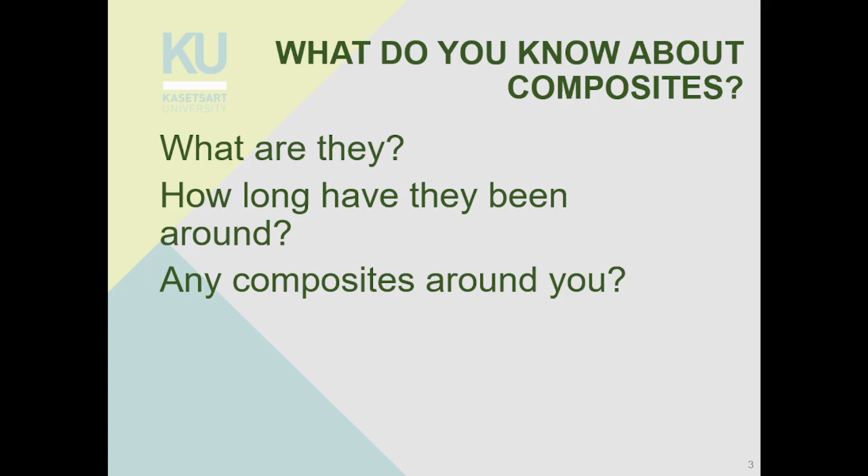But like I've just mentioned, composite materials have been around for a long time, right? So in fact, during the times of the Egyptian pharaohs who built the pyramids, composite material has also already been used. They used composite material to build the huts for the workers who built the pyramid. You might think of this as a simple brick, right?

But it's not that simple. It's not just made of clay. Usually they put in some straw, some husk like rice husk or wheat chaff in that to increase the strength of the bricks. In fact, nowadays we still do that. We still put some rice husks in clay brick to increase the strength. So it's been around for thousands of years - the concept of composite materials has been around for thousands of years.

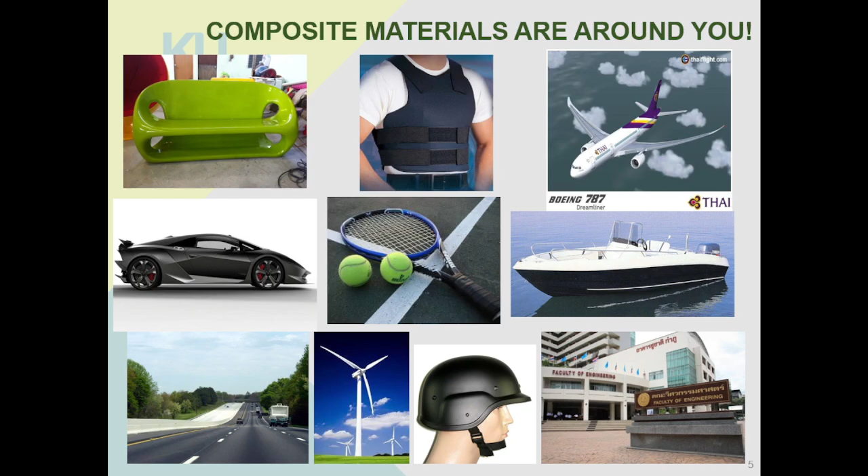So what is composite material? A composite material is a material that is made by combining two or more materials, and usually those two materials have different properties. When you combine them together, you make a material with unique properties that combine the properties of those two starting materials. The two materials work together to give the composite unique properties.

Within the composite material, you can tell the different materials apart. They do not dissolve or blend into each other, so you have a clear phase boundary. For example, alloys, say brass alloys. An alloy is when you mix two different elements together, like brass, where you're mixing zinc with copper to get brass. So you have zinc and copper, two different materials, but when you mix them together they are not composite material, they are alloys, because those two materials blend together to form a new material.

You cannot see a clear phase boundary between zinc or copper. Even though brass has better properties than zinc or copper, which satisfies this criteria here, they do not separate in such a way that you can identify this part is zinc, this part is copper. Because of that, alloys are not composites. An alloy is just a different class of material altogether.

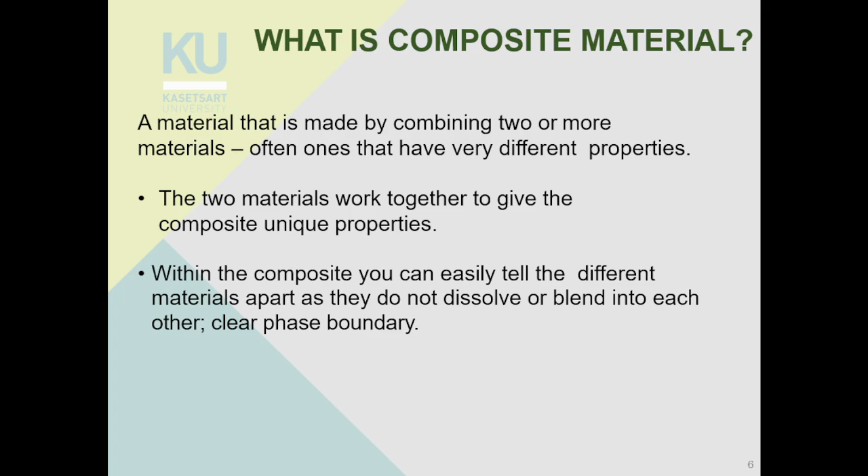Okay, so that is what a composite material is. So next we will look at the different categories of composite material by considering the constituent materials.

So when we classify composite material, we can use two different criteria. The first criteria is to look at the matrix. The second criteria is to look at the reinforcement phase. Basically, composite material consists of the matrix and the reinforcement.

Usually the matrix is the starting material - not always the case, but in about 80-90% of cases, the matrix is the starting material, and then we put in the reinforcement phase to enhance the property of the matrix. The matrix phase is the continuous phase. The purpose of the matrix phase is to transfer stress or transfer the load to other phases and protect other phases from the environment.

And we can have three different types of composite if we use the matrix phase as the criteria: metal matrix composite, ceramic matrix composite, and polymer matrix composite. So the criteria to classify composite material depends on the type of matrix that we use - whether it is a metal matrix composite, ceramic matrix composite, or polymer matrix composite.

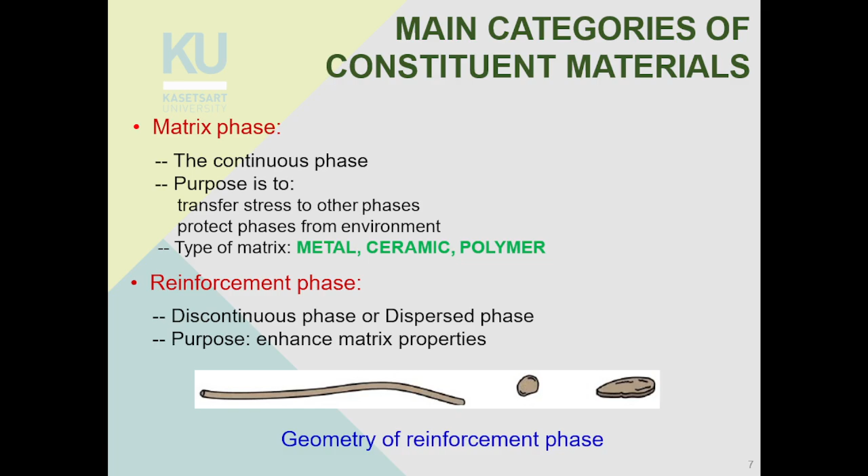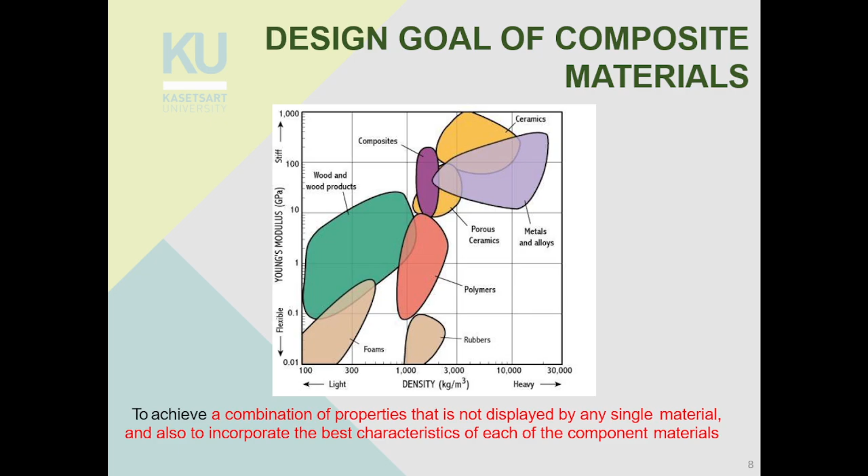E is Young's modulus or elastic modulus. So basically, polymers have really poor mechanical properties compared to other groups like ceramics and metals. You can see here, polymers have really poor Young's modulus compared to ceramics and metals. But polymers are lighter, so we want to make a material that is light because we want to use polymer. But at the same time, we want to make it stronger, tougher by increasing Young's modulus, yield strength, tensile strength, by adding in some other reinforcement.

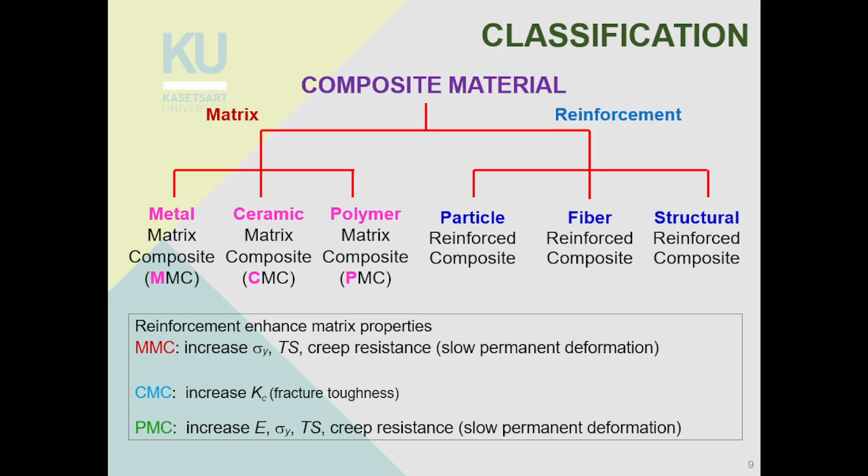So let's see - the classification by the matrix is quite straightforward. It depends on the type of the matrix, and you can classify it quite easily. But the classification by using reinforcement can be a little bit more tricky because you can have some subcategories.

So you have particle reinforced, fiber reinforced, and structural. For particle reinforced, you can have large particle, or you can have really small particles, which is called dispersion strengthened composite. So for particle reinforced composite, you can have large particle reinforced or really small particles reinforced. For example, large particle reinforced is concrete, or dispersion strengthened is cast iron. So looking in more detail there.

For fibers reinforced, you can either have continuous or long fiber. When you have continuous fiber, you can have alignment of the fiber, so the properties will be somewhat anisotropic. For discontinuous or short fiber - so for fiber, you can say that you have two types: long fiber, which is continuous fiber, or short fiber, which is discontinuous.

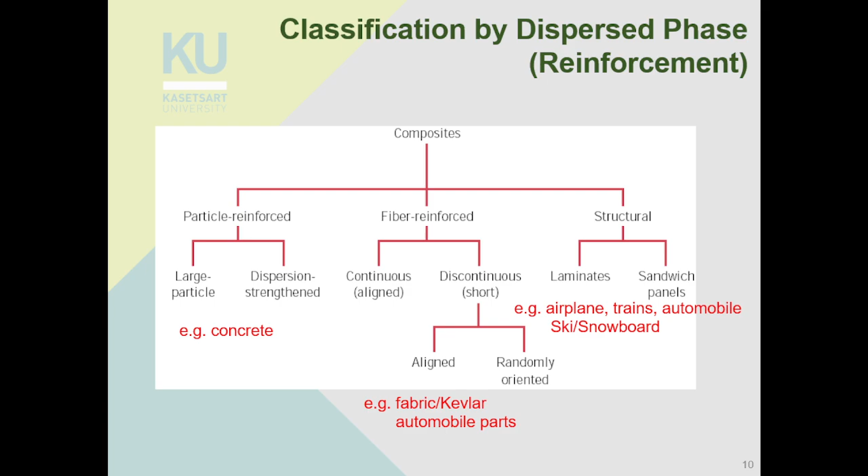We don't want to make it out of concrete or a thick sheet of metal because of the weight. So we are using structural composite to make it feel like we are walking on a thick sheet of metal, but really we are stepping on a few millimeter piece of metal with some stuff inside. So those are sandwich panels or laminates. We'll look into more detail.

So first we'll look at the particle reinforced composite. Like I mentioned earlier, you can have either large particle composites or dispersion strengthened composite, depending on the size and depending on how those particles can help improve the load, improve the mechanical properties of the matrix.

For large particles composite, the improvement in mechanical properties come from the strong bonding between the matrix and the particle interface. So say you have a piece or a cube of large particle reinforced composite like concrete - you have matrix, which is made from cement, and particles, which is rocks and gravel. So you have this strong bonding so that the load is transferred to the aggregate quite easily.

For this type, for large particle composite, the particles can have quite a variety of geometries. But the particles should be approximately the same dimension in all directions, or equiaxed. In other words, you can have different shapes and sizes, but ideally the particles should be about the same size in the x, y, and z axis. So either spherical or some sort of cubic shape is ideal, but it doesn't have to be.

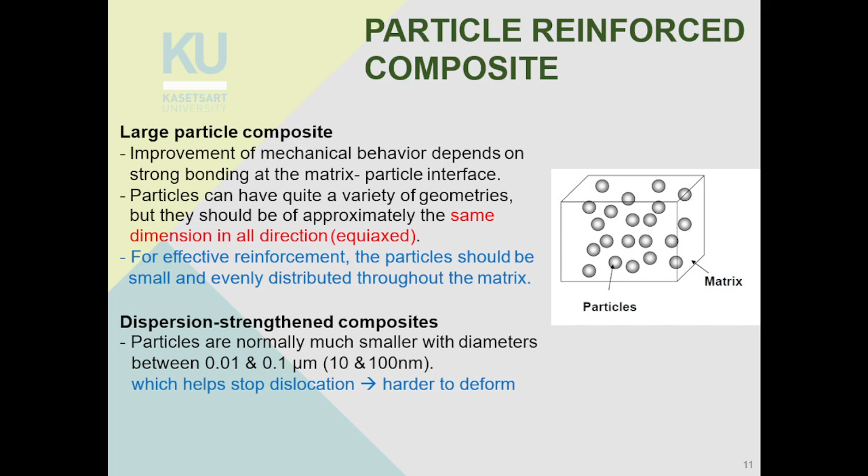If you look at this microstructure, you can see rubber as the matrix, and all these particles are carbon particles in the size between 20 to 50 nanometers. So it is actually a dispersion strengthened composite, because the particle size is between 20 to 50 nanometers, and because of these particles, dislocation movement becomes much more difficult. So the strength increases. Apart from the increase in strength, you have an increase in hardness as well.

Let's have a look at some example of ceramic or metal matrix composite, with cemented carbide, etc. For example, you have tungsten carbide and cobalt. Usually you mix tungsten carbide powder with cobalt powder, and then you sinter it in a method called powder metallurgy.

In powder metallurgy, you mix the powder together and then you sinter, or put it in the furnace at high temperature, but not as high as the melting temperature. So those two types of powder mix together and form this structure, and it can be used to coat or to make, for example, drill bits, cutting tools like circular saws, like this.

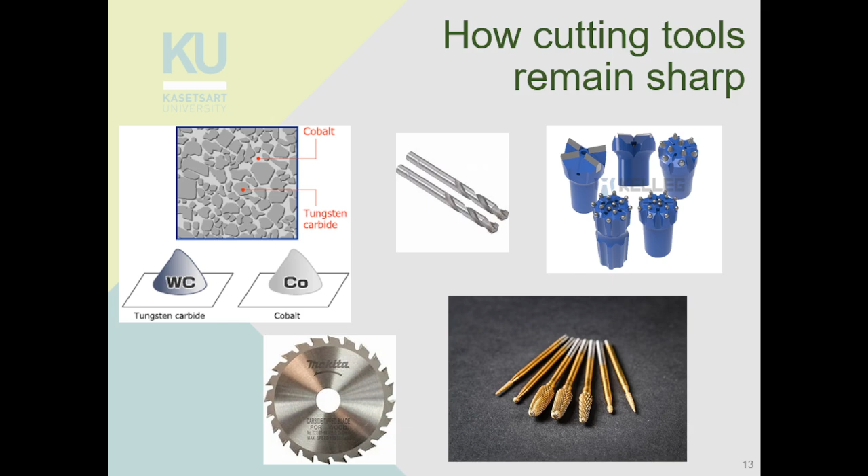So let's have a look at why we put some carbon black inside rubber. One of the unintended consequences of adding carbon black in natural rubber to make car tire is that it makes the car tire black, because we add in carbon black. The reason we want to add carbon black is because we want to improve the hardness, in other words, durability of the car tire.

But there are different amounts of carbon black that we can add to the rubber. For example, if we add a lot of carbon black, you make the car tire really hard, because we want to improve the hardness. But when the tire is really hard, it will last longer, but you will get worse grip.

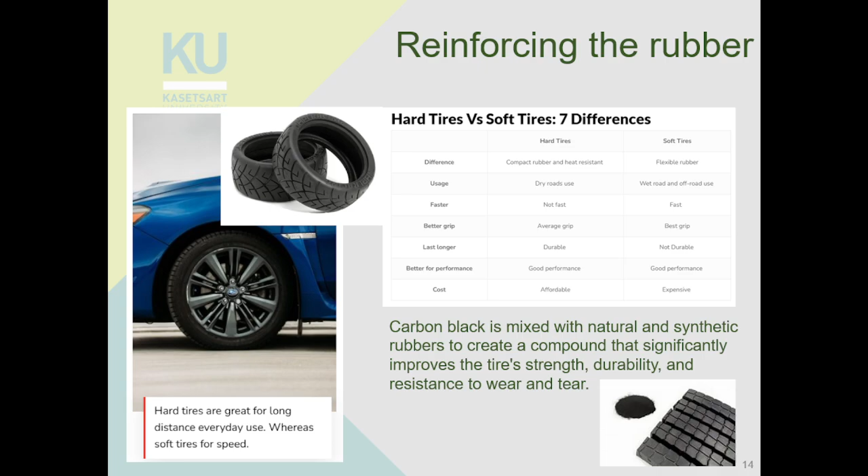Harder tires don't grip the road quite so well, but because they are harder, they will last longer. So you have to balance between those two factors.

Okay, next example is concrete. So what is concrete? Concrete is a particular type of composite material which is a ceramic matrix composite, but at the same time the reinforcements are also ceramics. So it's a special type of ceramic where the matrix and the reinforcement are the same type of material. Usually we use different materials from different groups to improve the property of the matrix. For example, fiberglass: we use glass fiber, which is a ceramic, to improve the property of the resin, which is a polymer. Or reinforcing steel in concrete, for example. But concrete itself is a composite material where the matrix is ceramic and the reinforcement is also a ceramic.

Concrete consists of cement, or the full name Portland cement, plus sand and aggregates like rocks, crushed rocks, etc. Concrete is very strong, very hard, but brittle. Like I mentioned earlier, that's why we have to add reinforcing steel to improve the tensile property of the ceramic. Concrete is quite heavy and cannot be recycled. The density of concrete is about 3,000 kilogram per cubic meter, roughly the same range as the density of rocks.

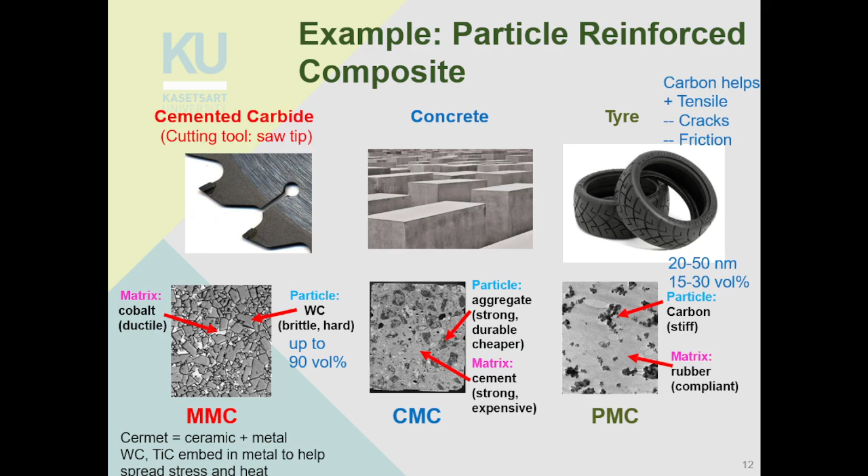So concrete is made from cement plus sand plus aggregate. First we have to know what cement is. Portland cement is the most widely used type of cement in construction or engineering applications. There are other types of cement, but they are not as popularly used because they are usually more expensive. Portland cement itself is relatively cheap, but compared to natural materials like rocks and aggregates, cement can be quite expensive. But compared to other types of cement, Portland cement is relatively quite cheap.

The reason for that is the raw ingredients for making Portland cement are natural ingredients like limestone, clay, and iron ore. We take all these natural materials, we crush them all together, and then we burn them in a rotating kiln or furnace, a rotating furnace called a kiln.

We get rock-shaped pieces about thumb size called clinker. So clinker is the product from crushing and burning all these materials together. But clinker is too big, about thumb size, so the surface area is quite small. We want to make the surface area bigger, so we want to make the clinker smaller by crushing the clinker into powder, increasing the surface area of the cement. And we add gypsum, or calcium sulfate, to retard the reaction, to make it a bit slower. So we get Portland cement. By mixing these three natural ingredients and burning them - we crush them and then burn them in the kiln - we get clinker.

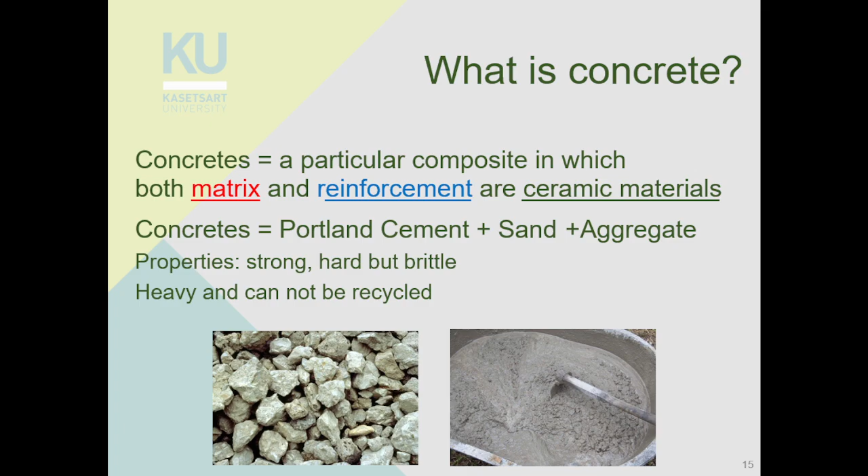Concrete consists of Portland cement, sand, and aggregate. We've looked at Portland cement, so next we'll look at sand, the next ingredient of concrete. Sand is chemically silica, which is silicon dioxide.

Sand is silicon dioxide, and it is a fine mineral. The size of the grain of sand that we use in concrete is between 0.1 to 1 millimeter diameter. 0.1 millimeter is about 100 microns, so between 100 micrometers to 1 millimeter. Basically the smallest size of sand that we use has the same dimension as the thickness of a human hair.

All sand contains some absorbed water because sand particles have a lot of surface area and absorb moisture from the air. So you have absorbed water, and sand is used to fill voids between the coarser aggregates. When you pack rock together, you have holes between those pieces of rock, and sand can go in and fill those spaces to make the structure denser and use less cement as well.

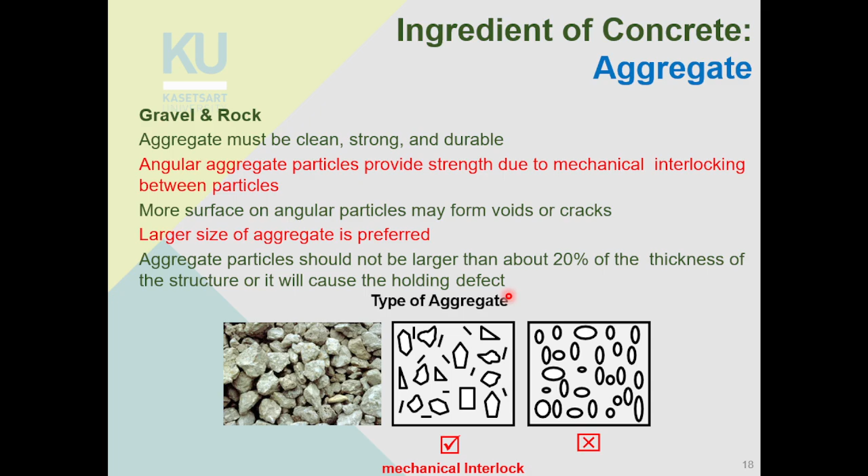In concrete we have cement, sand, and aggregates. The only ingredient left is water. So we mix water with cement and we get a hydration reaction. Hydra is the Greek root for water, while the Latin root for water is aqua. So a hydration reaction is basically the reaction with water. In this case, cement hydration is the reaction of cement with water.

You can see that for tricalcium aluminate, when it reacts with water, you get this structure here, plus another type of chemical plus heat. Dicalcium silicate reacts with water to give calcium silicate hydrates with heat. For tricalcium silicate with water, you get calcium silicate, hydrated calcium silicate, and also calcium hydroxide.

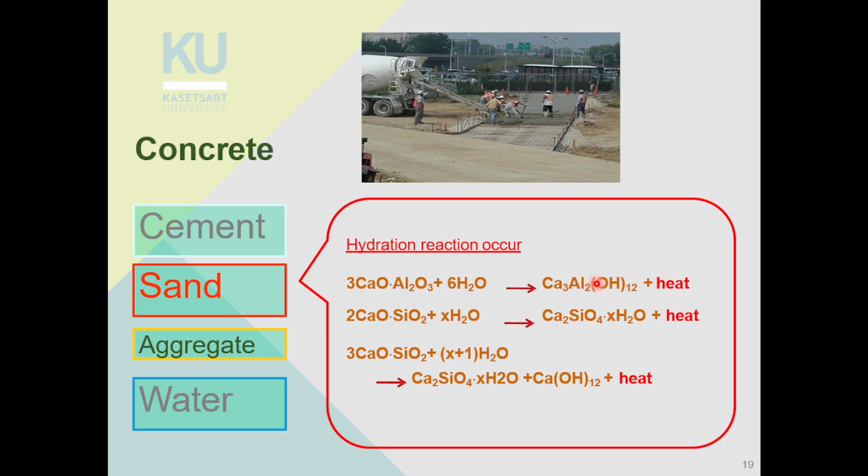Next, we look at the curing and properties of concrete. Like previously mentioned, in cement you have three main active ingredients: alite, belite, and celite, and they react to water differently. alite and celite react faster with water, and belite reacts with water more slowly. The strength of the cement and concrete depends on the reaction of alite, celite, and belite. You can see that the high strength comes from the reaction of belite and water to get your higher strength.

But it takes a long time. So that means for concrete to achieve the high strength that we require, it will take a long time as well. Hence the curing process — basically, concrete is expected to be cured for 28 days until it reaches the optimum strength.

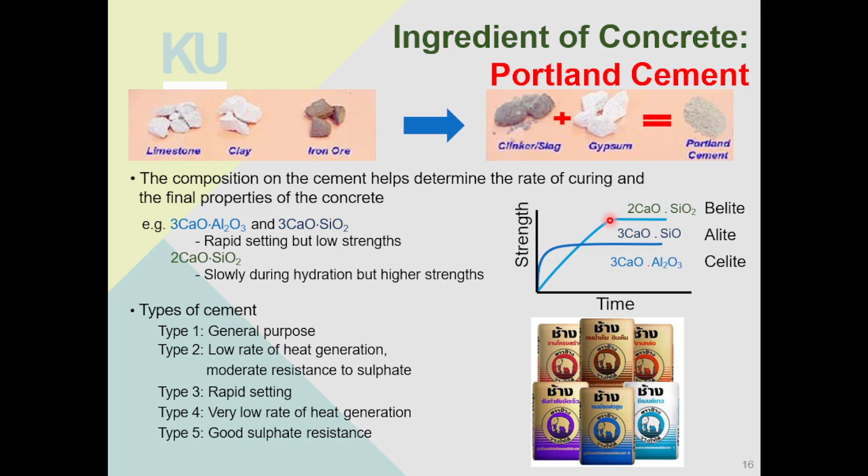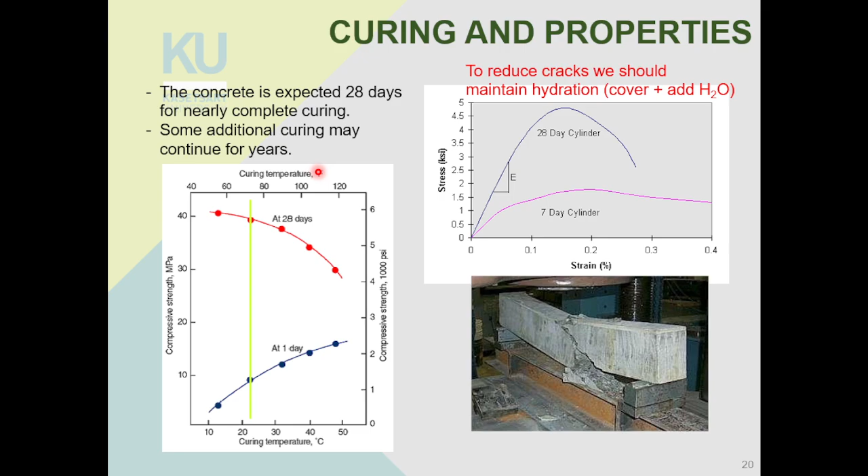The reason for that is, as mentioned earlier, the strength of concrete comes mainly from belite - the ultimate strength, the final strength, comes from belite. And belite reacts really, really slowly with water. It takes up to 28 days to get up to the maximum strength, or close to the maximum strength. Sometimes it takes years to get to the maximum strength. If we can keep the water inside the concrete, it will develop increased strength years after it is first produced.

Important factors that influence the properties of concrete: the first one is the water to cement ratio. If you have too little water, you will have low strength, because you don't have enough water for the hydration reaction to occur. So you get low strength.

If you have a high water cement ratio, you will improve workability of the concrete. That means the concrete can flow much easier. You can shape it into the shape you want much easier over a longer period of time. Workability can be measured using a test called the slump test. We'll look at some tests in a bit.

But if we have too much water, we will have a decrease in compressive strength, and we will have an increase in shrinkage of concrete during curing, creating cracking. So we need an optimum amount of water - not too low, not too much. An optimum amount.

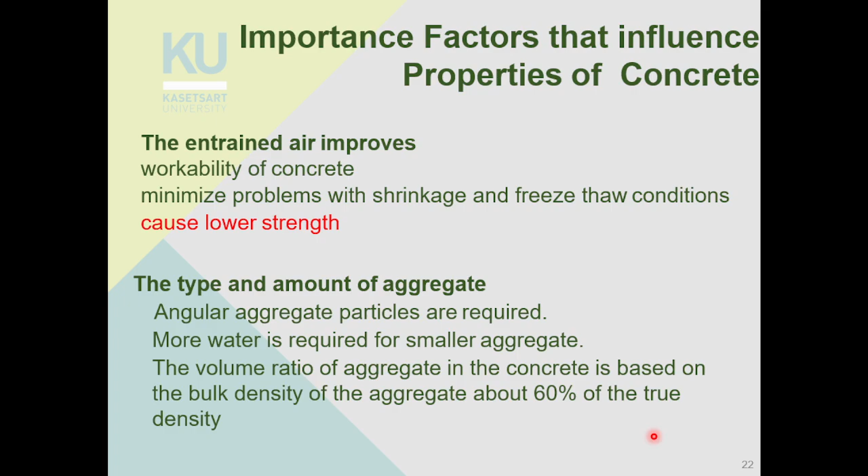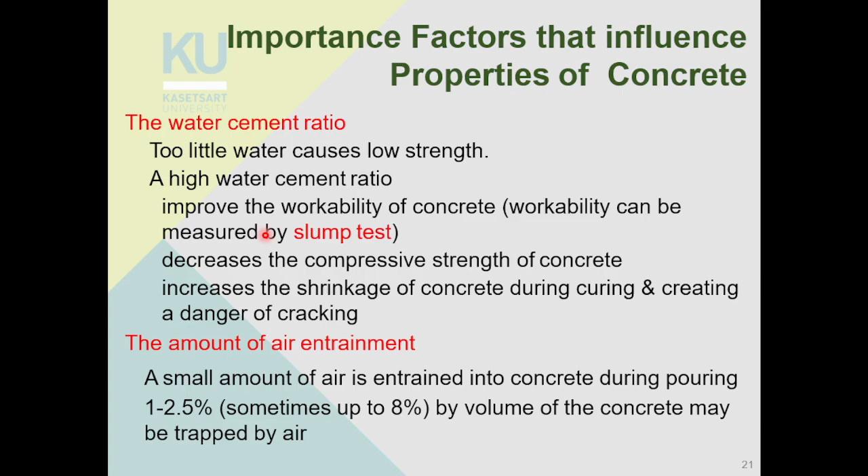So we were talking about workability of concrete, and a way that we can test for workability is by using a slump test. When we mix a concrete sample to use in casting a structure, we take a sample of concrete and put it inside a cone - this cone-shaped equipment, about 30 centimeters high.

On one side it's got 10 centimeter diameter, on the other side it's got 20 centimeter diameter. So you turn the cone upside down first, with the smaller side on the floor initially. Then you pack in concrete inside the cone, and then you turn it right side up, so you put the larger end on the floor.

When you put the larger end on the floor, you take off the cone, and you get this concrete slump. If you look at this picture, you have the concrete slump next to the cone itself. We measure the height at the top of this concrete slump and the top of the cone - the height difference between the two.

So for concrete with zero slump, after you take the cone out and measure, that's zero slump - meaning the top of the slump is the same height as the top of the cone. This is not very good because you don't have any slump at all, meaning it's really difficult to flow. We want a true slump, where the concrete flows down a little bit.

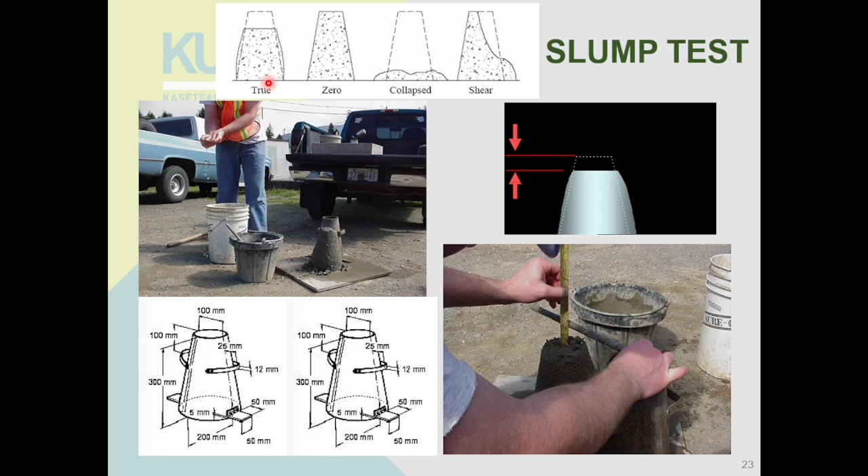So you have a little amount of flow. The slump test is usually reported in centimeters - how many centimeters different between the top of the slump and the top of the cone. We want a true slump, where the concrete holds its shape but not the same height. We don't want any collapse slump or shear slump - that means poor quality concrete and poor workability. For zero slump, there's no workability at all. For collapse or shear slump, we have really poor quality concrete. A true slump will give you good quality concrete and good workability.

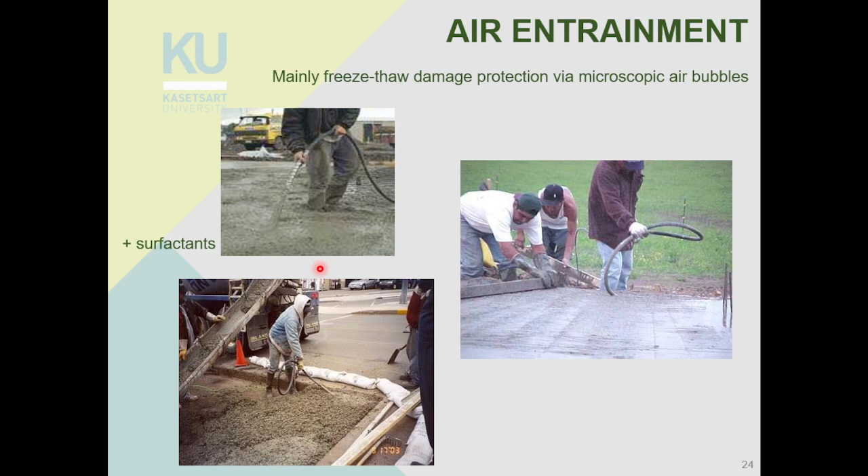The factors that affect the workability of concrete - one of them is air entrainment. We can use surfactant to increase air entrainment. Mainly, we control air entrainment to prevent freeze-thaw damage by creating air bubbles or entrained air inside our concrete, putting in some air inside the concrete there.

A quick question: we know about concrete, and sometimes if you consider the road surface, it's not concrete - we have asphalt mix. Sometimes we have asphalt mix on the road and not concrete. So the question is: is asphalt mix a composite material? And if it is a composite material, what is the matrix and what is the reinforcement?

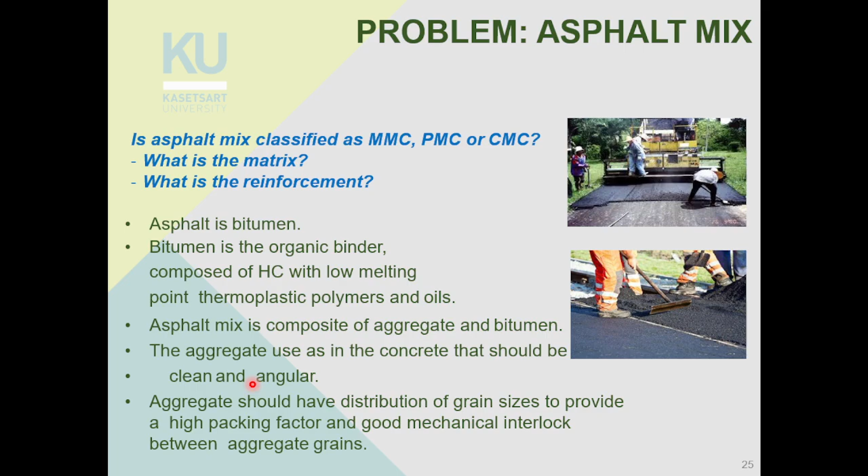Okay, so we've learned about different types of particle reinforced composite. Next, we will look at the properties of the particle reinforced composite. As you might imagine, the properties of the particle reinforced composite should have properties between that of the matrix and that of the reinforcement. So we will look at the different properties of particle reinforced composite.

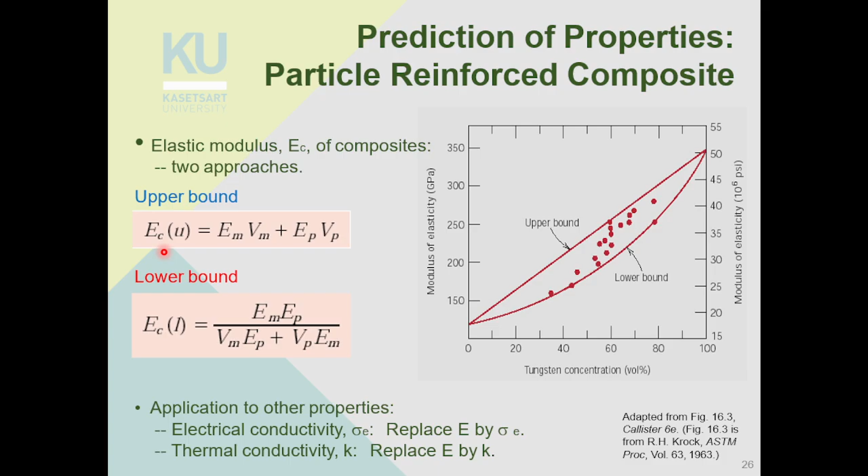This approach can be applied to other properties as well, like electrical conductivity, sigma E, replace E elastic modulus with sigma E. Thermal conductivity, replace E with K, etc.

An example: a large particle composite consisting of tungsten particles within a copper matrix is to be prepared if the volume fraction of tungsten and the copper are 0.4 and 0.6 respectively. Estimate the upper limit and lower limit for the specific stiffness of this composite given the data that follows.

Specific gravities 8.9 for copper, 19.3 for tungsten. Modulus of elasticity is 110 gigapascal for copper and 407 for tungsten.

For the upper bound approach, the elastic modulus is EMVM plus EPVP, so we just plug in the numbers. The matrix is copper, E copper is 110, volume fraction is 0.6, plus E particle, which is tungsten, is 407, volume fraction of 0.4. Calculating that, we get 228.8 gigapascal. Quite simple, really, for upper bound.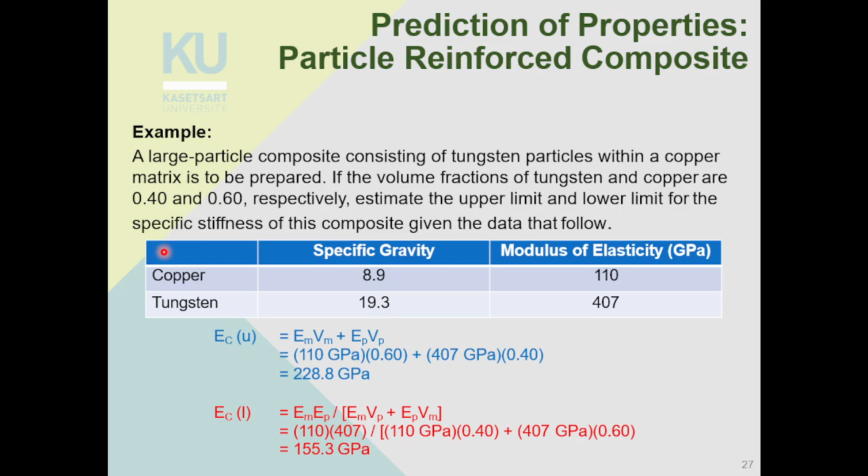For lower bound, we use a different formula: EMEP over EMVP plus EPVM. We plug in the numbers, we get 155 gigapascal. So for this particular composite material, the elastic modulus is somewhere between 155, the lower limit, and 228 gigapascal, the upper limit.

So we've talked about particle reinforced composite. Next, we'll look at fiber reinforced composite. For fiber reinforced, we can have whiskers, which are really short fibers, thin single crystals with large length to diameter ratio, of graphite, silicon nitride, silicon carbide, with high crystal perfection, extremely strong, very expensive.

So when we are talking about whiskers, we are talking about single crystals. That means that whole fiber is one crystal, and because of that it is very expensive to form, but it is extremely strong because it is a single crystal with high crystal perfection, so there's no defect. That makes it really, really strong, for example silicon carbide whiskers or boron nitride whiskers.

For fibers, we can either have polycrystalline or amorphous. Notice the difference here: whiskers are single crystal, but for fibers, it can be polycrystalline or amorphous. That's the difference. The size can be about the same.

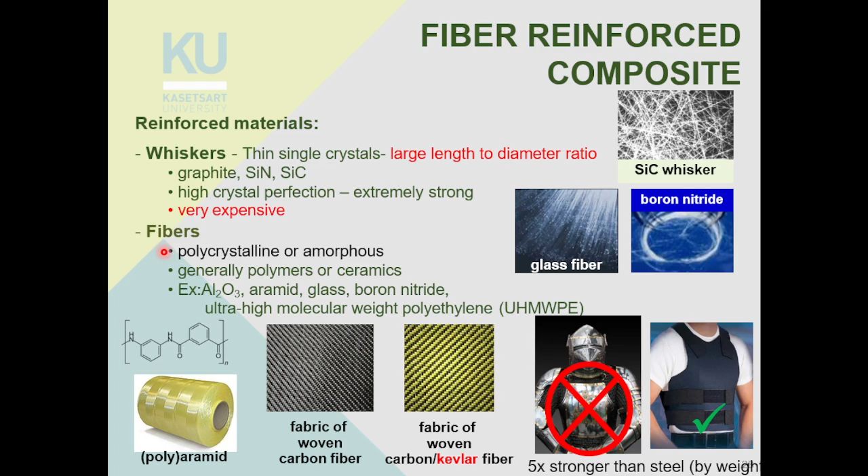But you can have other manufacturers that can produce polyaramid fiber in other colors, like black, as well. So it doesn't mean you have fake polyaramid, it just means you have fake Kevlar. Because carbon fibers and Kevlar fibers have different colors, when you weave them together you get this distinctive pattern. Kevlar fibers are about 5 times stronger than steel in tension, for the same weight, in tension.

Okay, so next we have possible arrangement of fibers in fiber reinforced composite material. There are many different ways the fibers can be arranged. When we have short or discontinuous fibers, we can have discontinuous and randomly oriented fibers, where the fiber direction doesn't matter - it's just random, pointing everywhere.

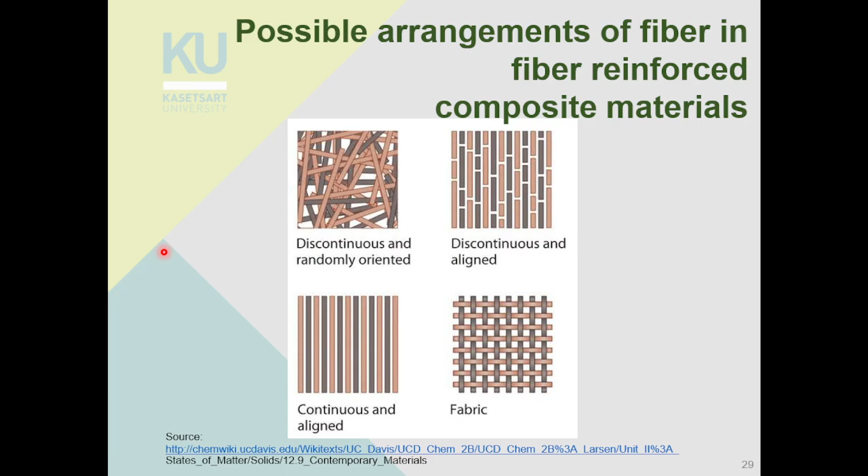And when I mentioned that these two pictures, even if made from the same materials, same matrix, same reinforcement, and same volume fraction, will have different properties - why is that? Because the fibers are strongest in the direction of the loading, the stress.

So if you look at this aligned continuous fiber, aligned discontinuous fiber, and randomly aligned fiber, you can see that for aligned continuous fiber, it is very strong in the direction of the fiber, and it is very weak in the transverse direction, because the fibers do not help transfer the load at all. So it is very weak in this direction, very strong in this direction.

And when you have different properties in two directions like this, we call that material an anisotropic material - anisotropic material, which means the properties of the material depend on the direction.

The same thing applies with short or discontinuous fibers that are aligned - you have better properties in the direction of the fiber compared to the transverse or any other direction. So they are anisotropic as well, for aligned discontinuous fiber. Anisotropic means the properties depend on the direction.

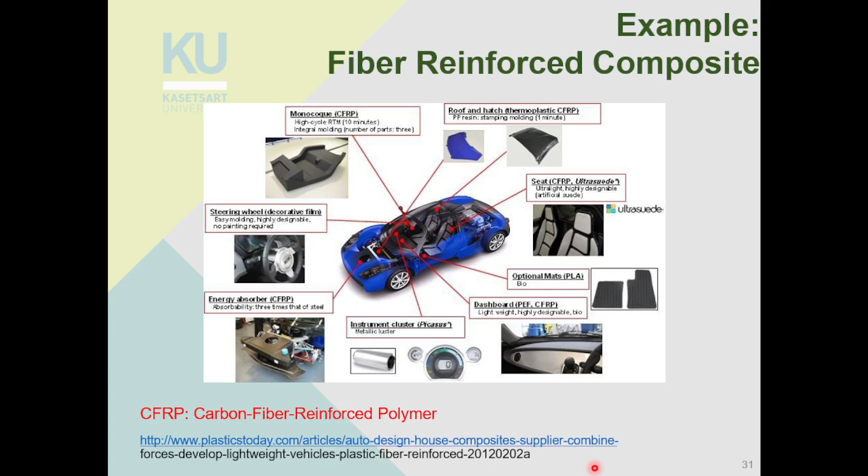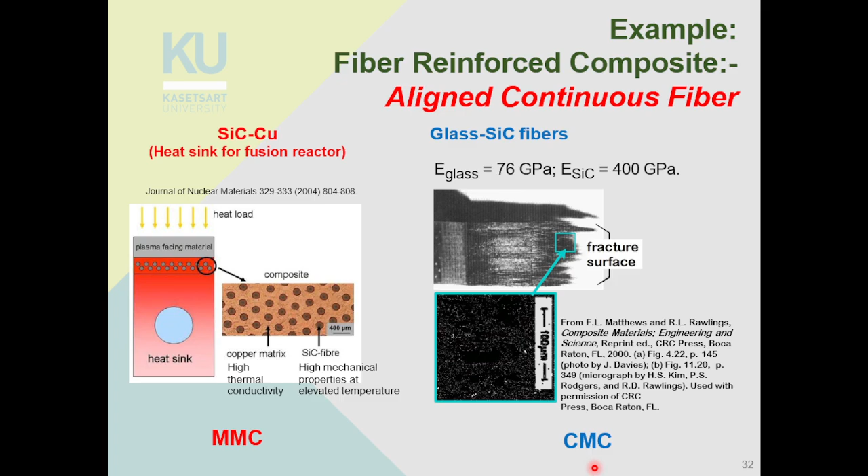Next is the glass silicon carbide fiber. In this case, glass is the matrix. Glass has really low elastic modulus compared to silicon carbide, so we add silicon carbide in there to increase the stiffness or elastic modulus of glass, and also to improve the toughness or K1C of glass. So the fracture surface becomes more ragged instead of flat like a typical fracture surface of glass. That means it can absorb more energy.

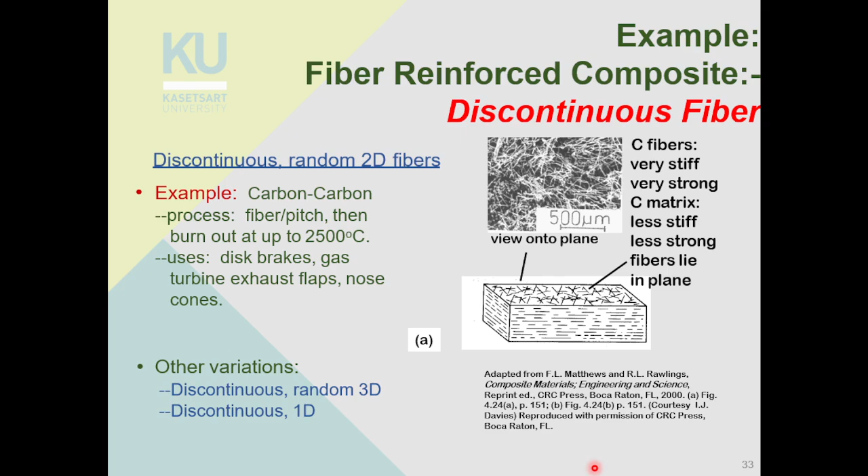So the enhancement of composite properties by variation of fiber length. For fiber reinforced composite, we have continuous fiber and discontinuous fiber, and the fact that we have discontinuous fiber means that different sizes of fibers can affect the reinforcement differently. We need a minimum size to classify that type of composite as fiber or short fiber, as compared to particles.

So if the size of the fiber is smaller than this minimum size, it can be considered a particle. If it's more than that, it can be considered a short fiber. And if it's longer than the maximum short fiber length, it can be considered a long fiber or continuous fiber.

The minimum length that we can consider a short fiber is called the critical fiber length, or LC, which equals sigma f times d divided by 2 tau c, when sigma f is the strength in tension of the dispersed phase, or the strength of the fiber.

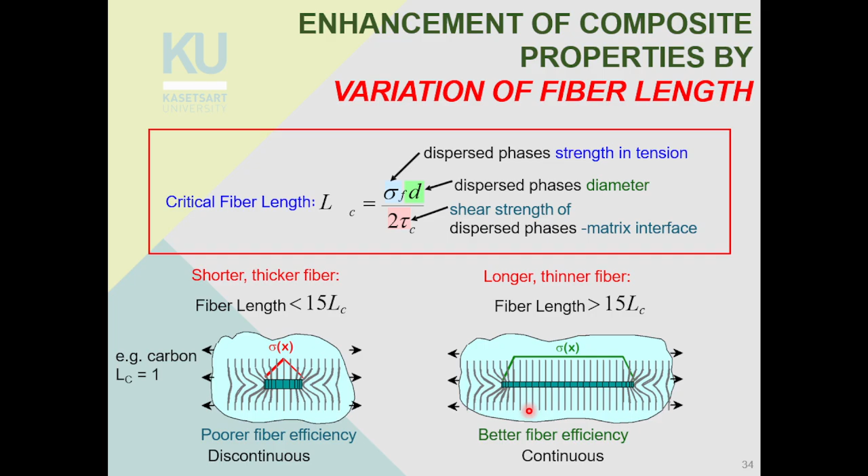For particle reinforced composite, we looked at properties of particle reinforced composite, and we use the upper bound approach and lower bound approach to estimate the strength, stiffness, or other properties of particle reinforced composite. For continuous fiber reinforcement, we can use the same approach as well.

The estimate of elastic modulus of the composite and tensile strength of the composite, in this case, is valid for continuous fiber composite, meaning long fiber, continuous fiber. The elastic modulus EC, elastic modulus of the composite, equals EM VM plus K EF VF, when EM is the elastic modulus of the matrix, VM is the volume fraction of the matrix, EF is the elastic modulus of the fiber, VF is the volume fraction of the fiber, and K is the efficiency factor. The efficiency factor depends on the alignment, whether it is 1D aligned, 2D aligned, or 3D aligned.

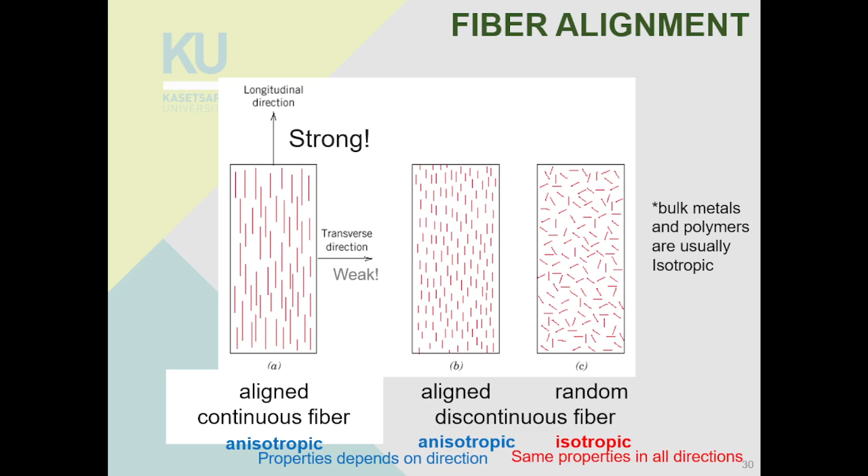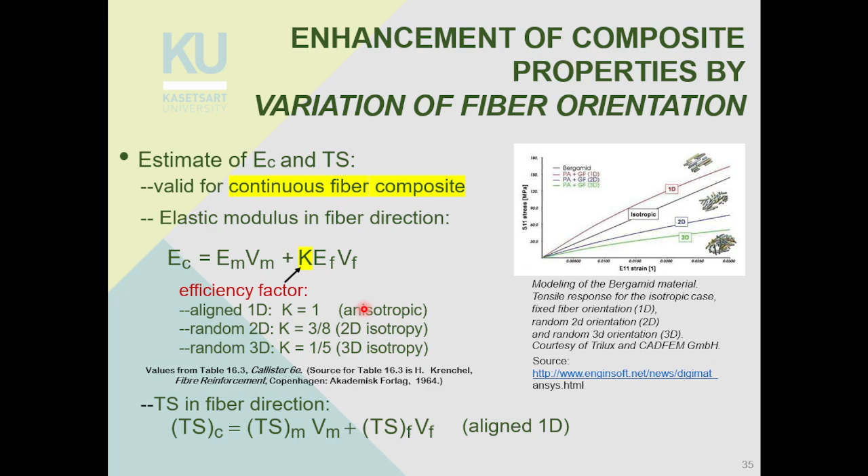Okay, so having said that, you have to pick this formula here, right? And because of the keyword of longitudinal direction, we know that it's aligned 1D, so we put in the K value of 1, right? Okay, so elastic modulus of the matrix is the resin, right?

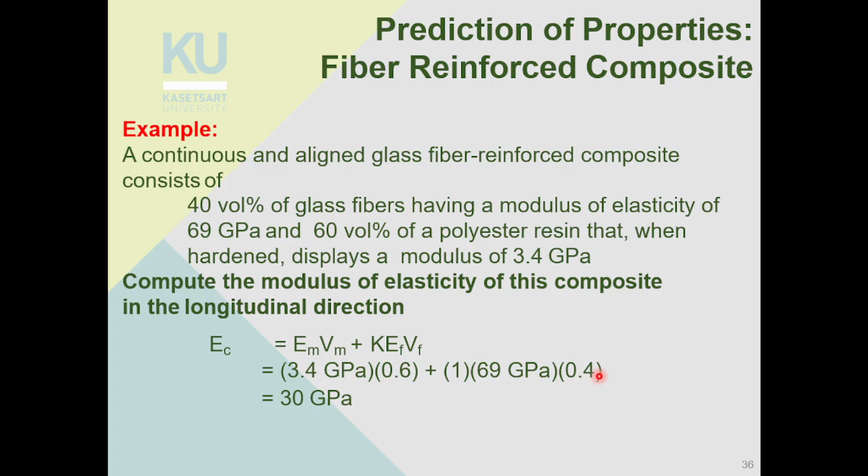The resin has the elastic modulus of 3.4 gigapascal. The volume fraction of the resin is 60%, which is 0.6, plus efficiency factor 1 times the elastic modulus of the fiber, which is 69 gigapascal, times the volume fraction of the fiber, which is 40%, which is 0.4. That gives you 30 gigapascal. All right, easy peasy.

Next, we will look at the structural composite, right? Structural composite, like I mentioned in the start of the class, is a little bit different than particle reinforced or fiber reinforced. It's different because for particle reinforced or fiber reinforced, you mix in the reinforcing phase inside the matrix. But for the structural composite, the reinforcement and the matrix are sort of like sitting on top of each other, like in either a laminate or sandwich structure.

A laminate is stacked and bonded fiber reinforcement sheets with stacking sequence of, say, for example, 0-90 or 0-45-90, depending on the application. The benefit of laminate is balance in plane stiffness, right?

So basically, you have fibers running in one direction, and you stack it on another layer with fiber running in another direction, depending on the stacking sequence. So if you call this 0 degrees, the next layer will be 90 degrees, and then go back to 0, and then go back to 90. Like I mentioned earlier, you can have 0, 0, 45, 90, 0, 0, 90, etc.

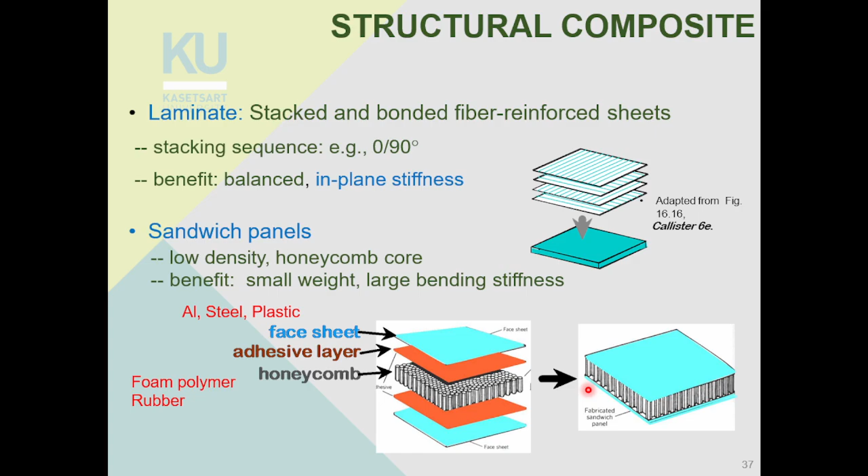It doesn't bend easily. So, like I mentioned earlier, the floor on the airplane that you walk on is usually this type of sandwich panel. It doesn't bend when you walk on it. It feels really stiff, it feels really solid, but it is really lightweight. This is a type of sandwich panel.

In the 787 Dreamliner, you can see that there's a lot of composite material, and a lot of it is carbon laminate composite, and also carbon sandwich composite. So there's a lot of composite material, especially laminate and sandwich panel. About 50% by weight of the plane is made from composite material. So it's quite scary, really, when you think about it, that 50% by weight of the plane is made from plastic, mainly. But, having said that, it is composite material, so the strength is better than pure plastic, and also it's coupled with other types of materials as well.

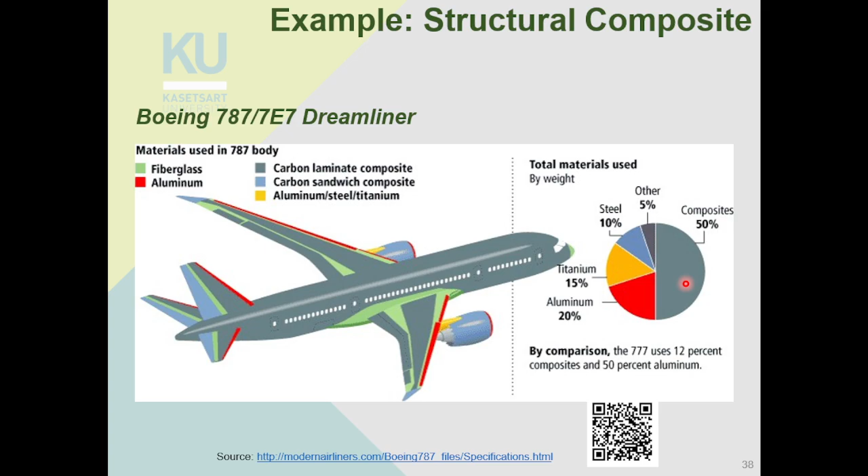Another type of structural composite: a combined laminate and sandwich structure. You have a laminate of carbon fibers as the face sheet, with aluminum honeycomb structure in between, so you have laminate face sheets and aluminum honeycomb inside. You get laminates and sandwich together, resulting in really good mechanical properties while being really light.

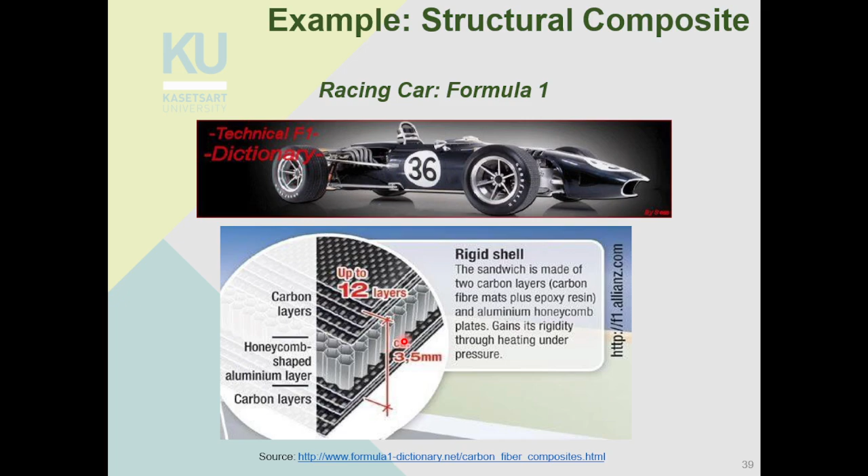It is used in Formula One cars, supercars, and hypercars.

Another example of structural composite is skis. For skis, you have different layers, and each layer performs a different function. You get the top layer, usually made from wood or polymers, to maintain stiffness. You get fiberglass to increase the triaxial stiffness, and a hardened steel edge to dig into hardened snow so you can turn easily. So skis are an example of structural composite.

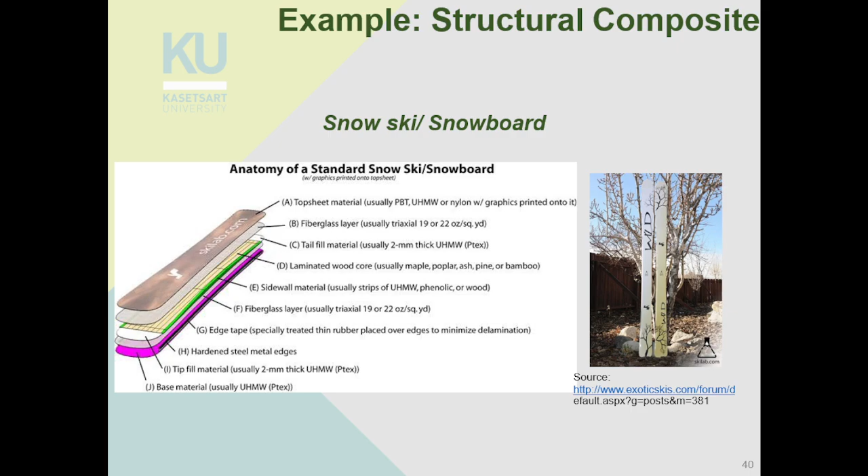Summary: composites are classified according to the matrix, like CMC, MMC, PMC - ceramic matrix composite, metal matrix composite, and polymer matrix composite. They're also classified according to reinforcement geometry, like particles, fibers, layers, laminate, etc.

For particulate reinforced composites, the elastic modulus can be estimated using the upper bound approach and lower bound approach. The properties of particle reinforced composite are isotropic.

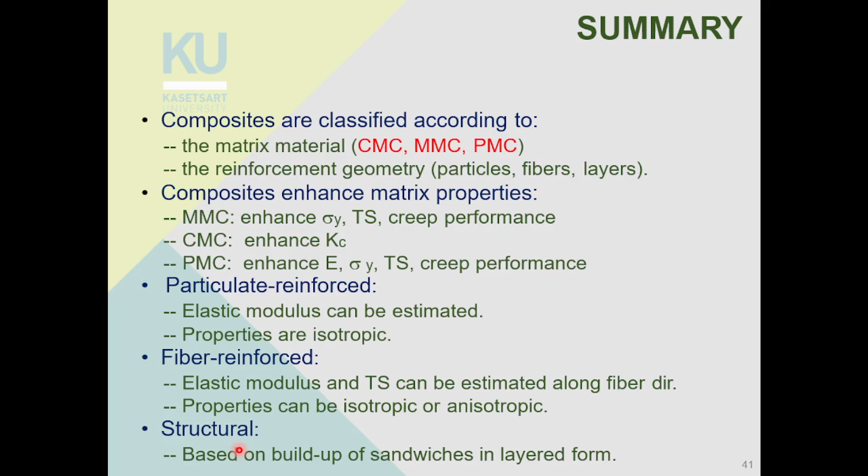For fiber reinforced composite, the elastic modulus and tensile strength can be estimated along the fiber direction. Properties can be isotropic or anisotropic: isotropic when you have a random arrangement of fibers, and anisotropic when you have aligned fibers. For structural composite, it is based on the build-up of sandwiches in layered form.

I'll give you a quick overview of composites in dentistry. Usually when you have tooth decay and want to fill it, they used to fill it with gold, and then amalgam, because amalgam is cheaper than gold - that's the main reason. Nowadays, you can have composite material.

The composite is called dental composite, and usually consists of resin and particles of glass or some sort of minerals. It is basically a particle reinforced composite, and also a polymer matrix composite, because you have a resin which is a polymer, reinforced with particles of glass, ceramics, or alumina.

The way you apply it is using squeeze needles. Inside this tube, you have the resin and particles mixed together already. You squeeze it in and shape it into the shape you want, then leave it to cure - it can be natural cure or usually UV cure. You shine UV light on the teeth, similar to a nail extension, where they put on the UV glue, put on the nail extension, and put it under UV light to cure the glue - the same stuff.

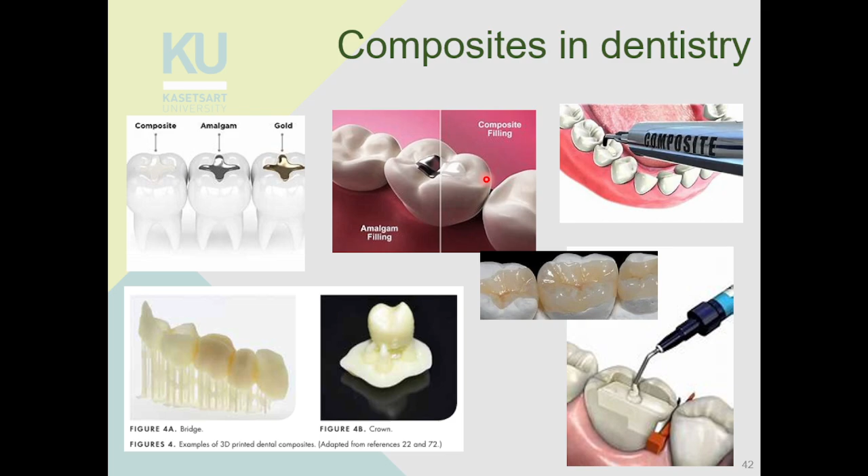Another example I want to tell you about is the use of 3D printing in dentistry, specifically 3D printing composite material - 3D printed composite material bridges and crowns. You can do 3D scanning of a patient's jaw and teeth, or X-ray, CT scan, MRI, to get a 3D model of the patient's jaw and teeth. Then you can manipulate that on the computer to get a new denture for that patient, and print out the whole set of denture or customized dental product using 3D printing.